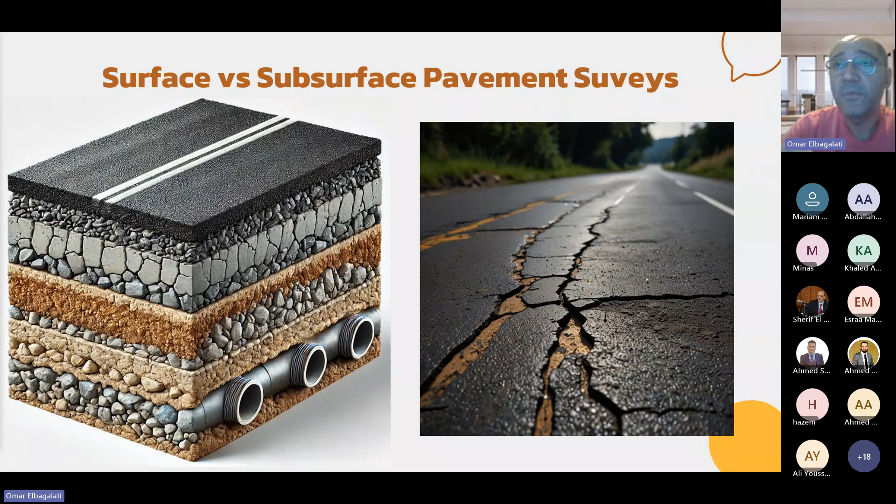Let's dive deeper and see some examples of what I can get from surface pavement surveys and what I can get from subsurface pavement surveys. So what is classified as a subsurface survey?

If you are interested in knowing your sublayer thickness, that's a subsurface pavement survey. Or maybe it's sublayer stiffness or subgrade capacity, like your CBR. Or maybe you are looking for moisture, trying to determine the moisture content of some of your layers, or even escaped moisture from a pipe leak. Voids, utilities, where are my electricity cables, where are my water and wastewater pipes, and so on. All of this is classified under subsurface pavement survey, and this is what we will focus on in this lecture.

On the right-hand side, this is where we have our surface. So what do I get from the surface survey? You get all the other good stuff that most of you should already be familiar with: PCI, the distresses like cracks, deformations, and potholes. Or maybe you are trying to determine the friction, surface texture, and of course roughness, the International Roughness Index, where you are trying to calculate IRI.

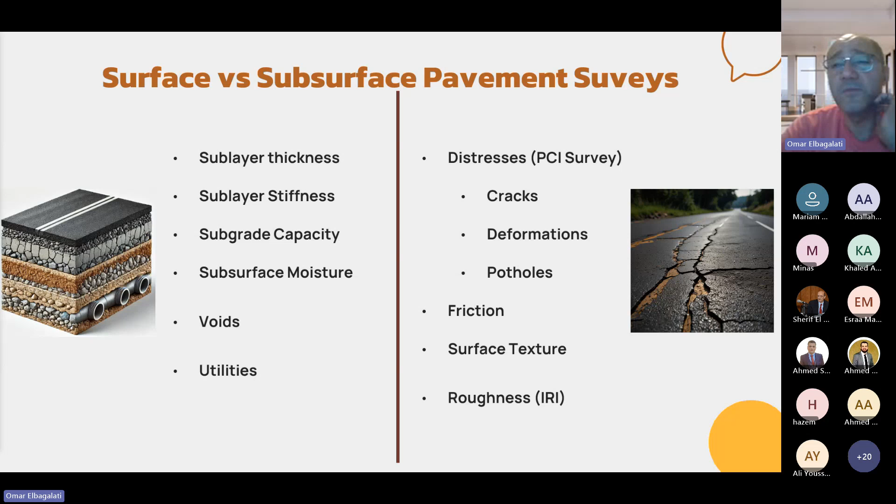If we want to classify subsurface pavement surveys deeper, I would say some of them are non-destructive and some are destructive, and today we will focus more on the non-destructive side. So what is destructive versus non-destructive? Basically, from what the name implies, if it is destructive, it means you are causing damage to your pavement section while doing the test. While if it is non-destructive, you are not causing any damage, the test itself is not harmful to the pavement.

Some examples of these are like the nuclear gauge that is used to determine the soil density or the sublayer density. GPR, which we will talk about in detail in this lecture. Falling weight deflectometers are also non-destructive testing used to determine the asphalt and sublayer moduli, if you will.

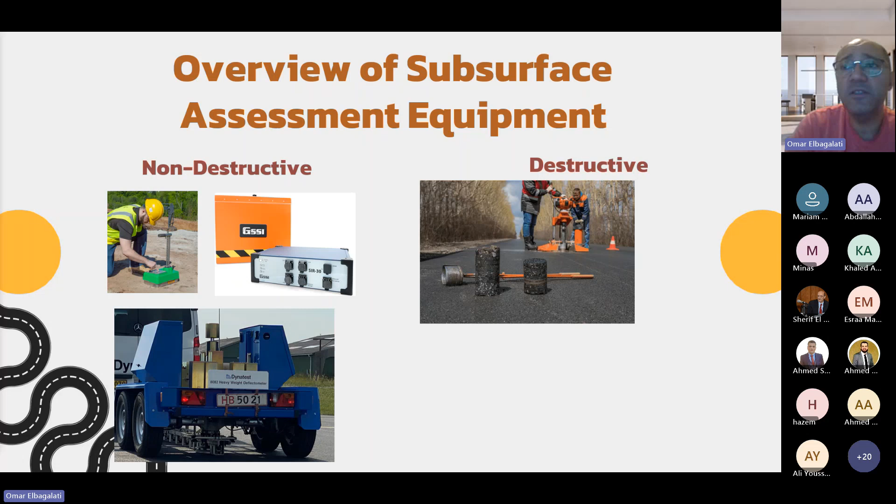On the other hand, you have destructive testing, and these are tests that cause damage to your pavement, like taking a core out from the pavement, or doing DCP testing to get your base layers and sub layers' CBR, or maybe you open a trench in the pavement and do your investigations from there. So what we will focus on today is subsurface, and not just subsurface, we will actually focus on non-destructive subsurface surveys.

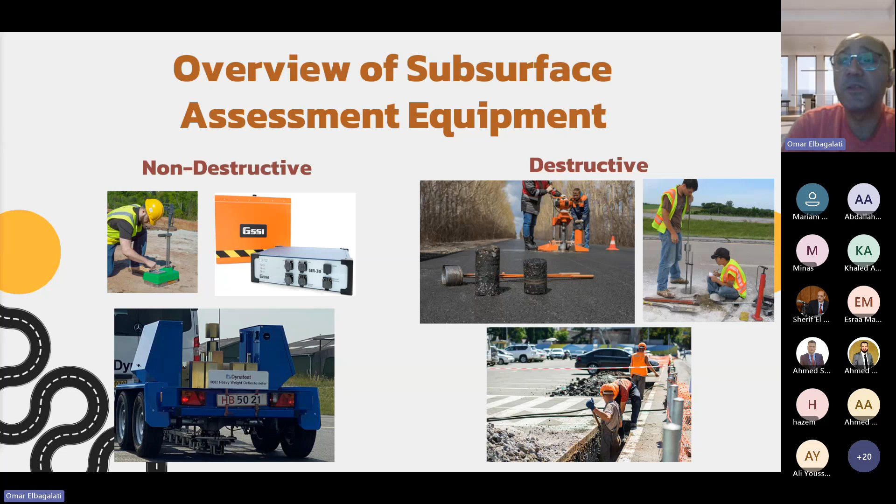So why do I do a subsurface survey? I'll explain this from two perspectives, one from the academic or scientific perspective, and the other from a logistic perspective. Let's look at the academic perspective one by one.

One piece of information you may get from doing a subsurface survey is your layer stiffness, the strength of your layers and sublayers. You can get this either non-destructively using the FWD, the falling weight deflectometer, or even destructively by doing the DCP or the CBR testing.

So why will I need something like this? If you want to do an overlay design, you first need to know the strength of your sublayers. If you are calculating a structural number, which you need if you are doing an overlay design using the 1993 AASHTO design method. If you are doing what we call PCR, ACR analysis on airports, which used to be called ACN, PCN - you may be more familiar with ACN, PCN, but recently the FAA has changed that system to call it ACR, PCR. And if you are trying to determine the remaining service life of your pavement - to do all of that, you will need to know the E-moduli of your layers and sub-layers of the pavement.

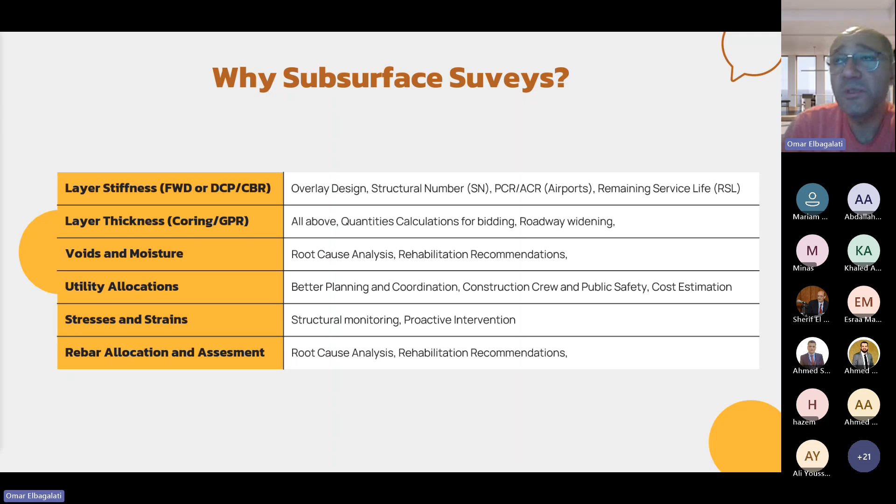So this is the why we do subsurface surveys in terms of the scientific side. But there is also a logistical side. Why do I even need to calculate thickness? Isn't the thickness something already in the design? Why don't I just open an as-built drawing or the design documents and figure out the thickness of my pavement?

There are three main reasons for this. Number one, I call it different entities. Within the same exact pavement segment, you will find so many players who have the authority to work on your pavement. Maybe the road was already designed and constructed, and the department that constructed this road is the roadway department. Then you have another department inside the city, or the county, and they have an in-house group, meaning they have the authority to go fix the road without contracting out someone. They already have the equipment and materials, and they go and do it.

Usually, these two entities, even in the US, don't communicate with each other. So they may go and add 1 or 2 inches of overlay, but they don't communicate. Now you have the as-built drawing, and you assume this is final, and you think you only have maybe 6 inches of asphalt, while in reality you have 8. But you don't know that because these two departments never talk to each other. Maybe a water pipe got broken, and the water department cut the road and fixed the pipe, putting in a completely different pavement section with different materials and thicknesses, and you never know about it.

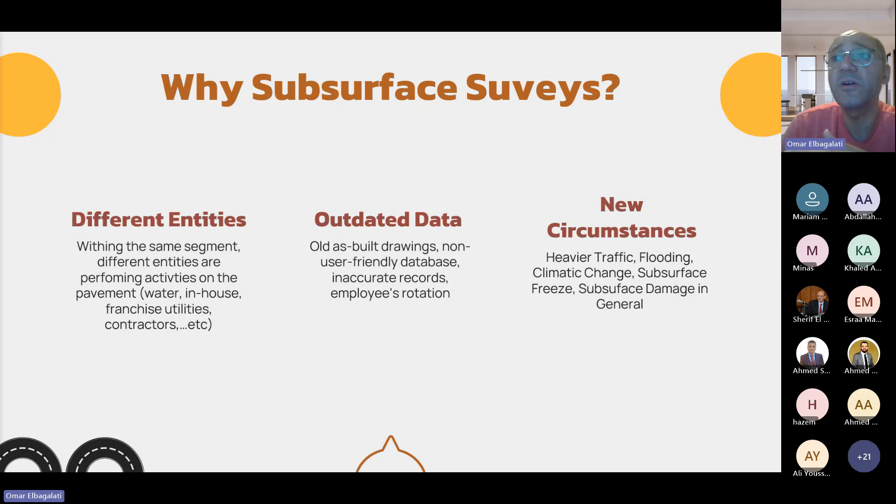So let's go and talk about our first example here for something advanced when it comes to surveying your pavement subsurface, or getting information about pavement subsurface. I trust most of you have experience or at least have heard of the term geotextile or geogrid.

So what is geogrid? Geogrids are basically this mesh, usually made of a poly material. You can imagine it as steel reinforcement for your soil and granular layers. It is not, of course, steel, but it performs the same function that steel reinforcement does in concrete, in soil, and in the base layer.

If we look at the section on the left bottom hand side of the screen, the very left is your pavement section if you are not using any geotextile. On the right hand side, if you use the geotextile or geogrids, because you are adding this extra reinforcement, you can actually end up with a less thick pavement section.

It has so many benefits. Basically, it's reducing the construction cost, reducing the construction time, even the environmental footprint, because if you are reducing the quantities, it means less water required, less fuel, less electricity, and everything, so less CO2 emissions and so on.

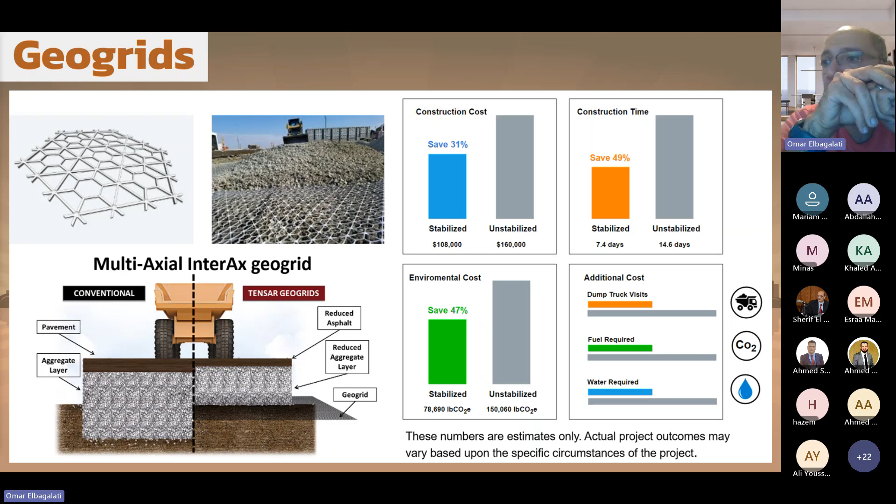But we are not here to talk about geogrids in their main function, which is making the road more stable or more strong. We are talking here about leveraging these geogrids by installing some strain sensors and temperature sensors on top of the geogrid itself.

You may have heard of a company called Tensar, which in the US is the biggest producer of geogrids. They came out with this idea, which is not commercialized yet. These geogrids come in rolls, and you spread these rolls over your subgrade layer, or between the base and the asphalt layer, during construction.

If I can have some sort of sensors on top of the geogrid and inside these rolls, when I stretch them over my pavement, I don't actually need any extra effort to add the sensors. They are already on the geogrid itself. So you are leveraging the time that you are already installing the geogrid in the pavement by adding these sensors in the factory from the beginning on the geogrid.

So the system that they have produced is basically simple. You have the strain sensor on the geogrid, it's on the pavement, everything is wireless, and it is being powered by, I would say, the motion or vibration coming from the vehicles moving above it.

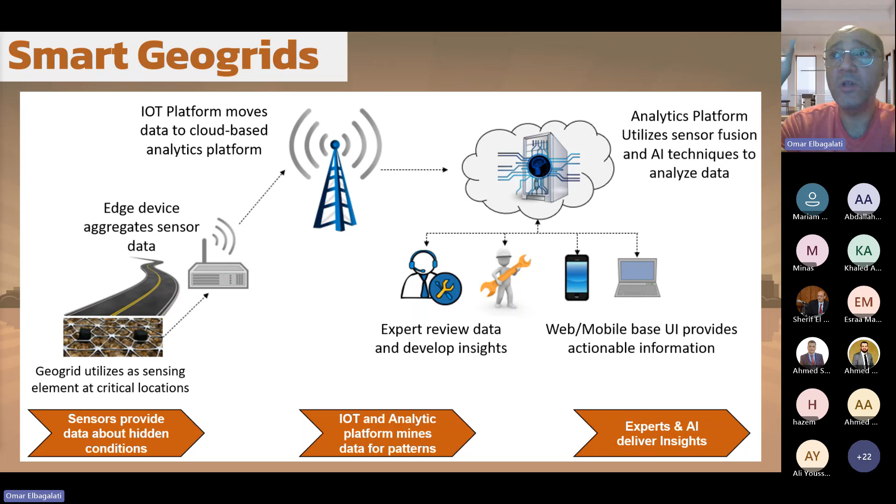powered by solar energy. So everything here is like you don't need any extra source of electricity. The edge device is powered by a solar system. The devices themselves, the strain gauges, are powered by the vibration coming from the vehicle.

I'm not an electrician, but I will try my best to explain how exactly these are powered by vibration. When a mechanical load passes over the sensor, it makes this piezoelectric transducer move, and when it moves and vibrates, it creates a current, and this current pushes the electrons to basically power your strain gauge, which will be enough power to transmit the data to the edge device.

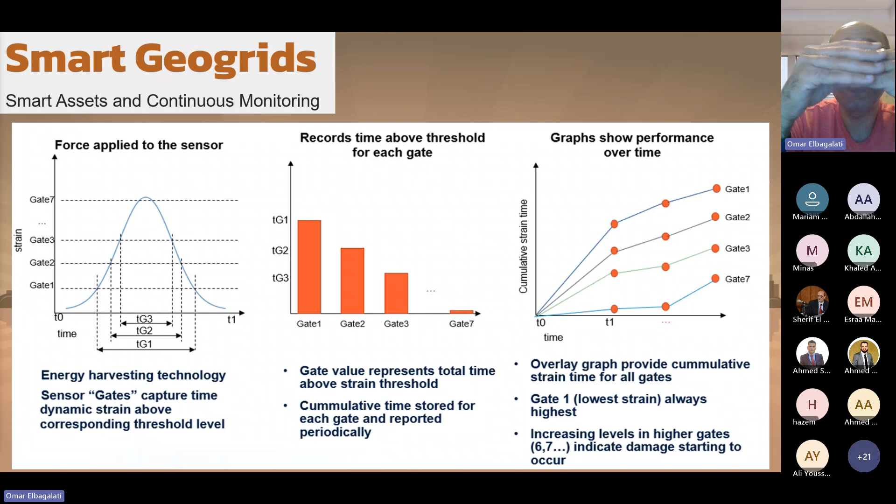If you see that gates number 6 and 7 are always being activated and you're collecting data, that means you have very high strains. This may be coming from the material getting weak, or because you have higher loads. But this is not what's important.

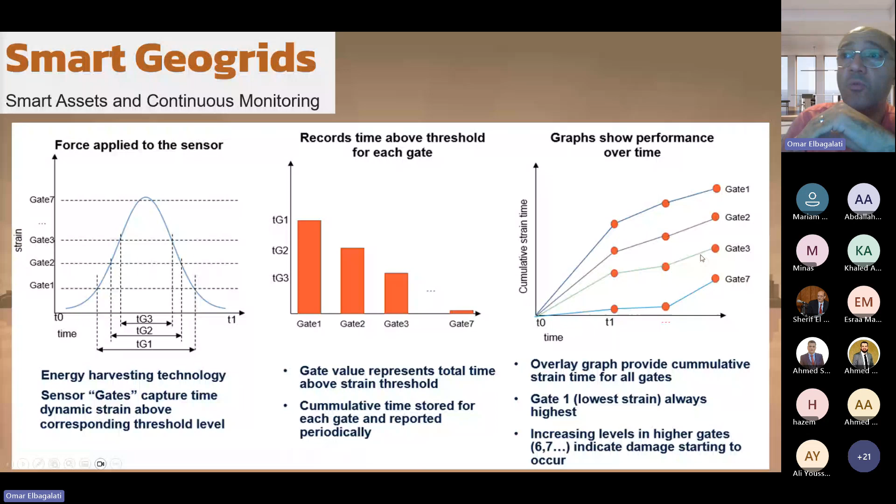What's important is what you see on the very right hand side, these slopes. Once you start seeing the slope, which is the accumulative strain with time, this will always go up. However, if it's going up with the same slope or a decreasing slope, it means your material is not getting weaker.

But look at gate number 7. If you see the last slope on gate number 7 starting to increase upward, that gives you an indication that your material at this exact point started to be damaged. So the pavement surface will still look very good. If you did a PCI survey, it will still be 100, but you know that things started to be bad down there from the tensile strain perspective.

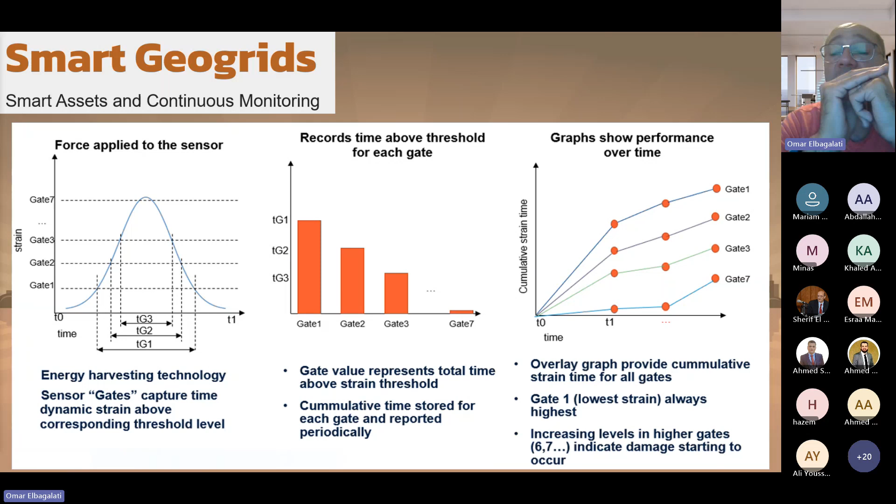So this is another way of looking at it. Imagine a car just passing by. You are measuring your response over time.

When the load passes, because it's at its highest, all the gates will be activated. Gate number 7 will measure the least amount of time, and gate number 1 will be the highest, and so on. Once you see D6 and D7 start being so high, it means your pavement started to get weaker.

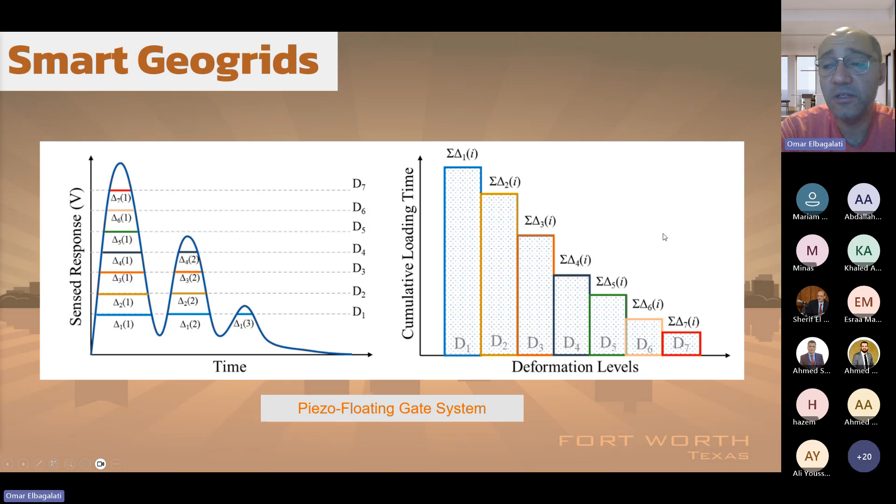So this system was actually tested in France. They have this testing facility, which I found to be fascinating. If you give it a look, they have these wheels rotating over the pavement.

It wasn't built just for testing sensors. Basically, let's say you came out with a new mix design or a new pavement material, and you want to figure out if it will last or have good performance. You go to their facility, pave a section, and they keep loading it.

This is what we call ALF, Accelerated Loading Facility. Basically, you are simulating maybe 20 years of traffic on a piece of pavement, but you can do this simulation in maybe 3 or 6 months.

There are many different shapes of this accelerated testing facility. In France, they are using this rotating one. Some others use a big truss with a wheel going back and forth, which they call HVS, Heavy Vehicle Simulator.

They've used this in France for the smart geogrids, and they started to test the damage, and did some FWD testing at the same time they were capturing data from the sensors. So the FWD testing, what we do is something called back calculation.

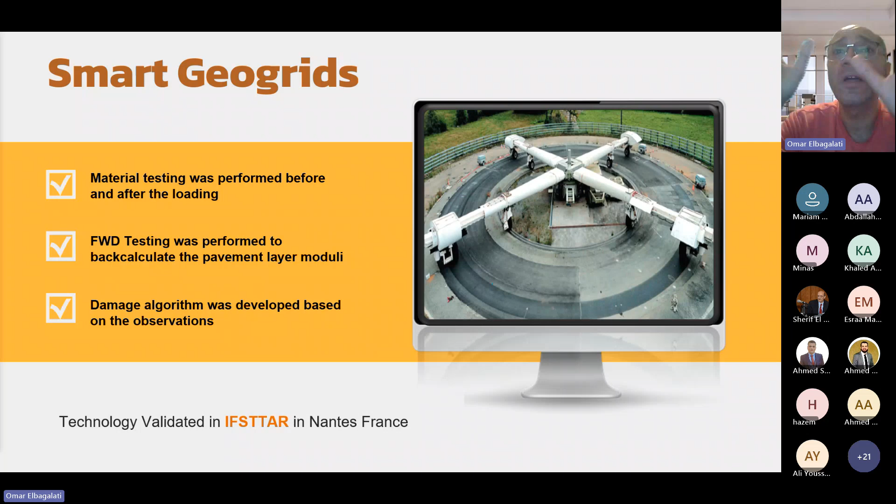So the system has been tested on real roads, tested in controlled environments in both airports and highway systems, and it was also tested in the lab. These are usually the steps you go through with a new product: you come up with an idea, prove the concept, test it in the lab, then in a controlled environment, and then completely outside on a real life road.

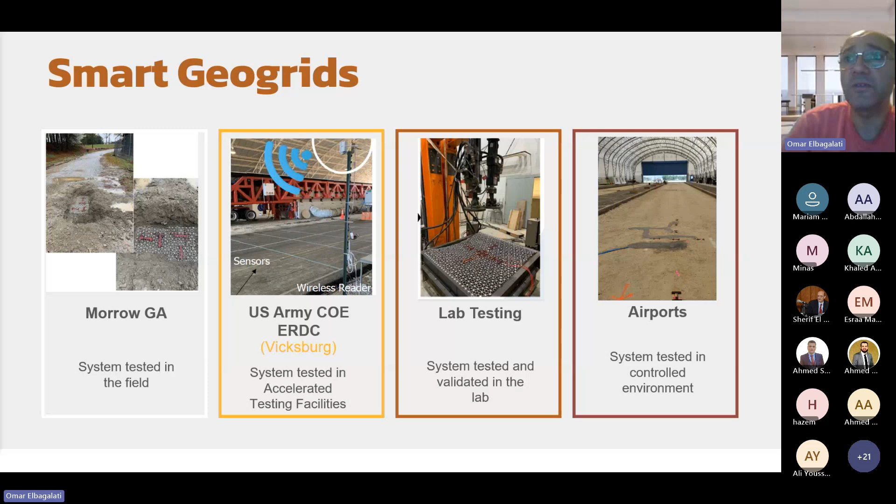So why are we actually doing that? What is the benefit of calculating the strain and figuring out what is happening before anything happens? If my road is in good condition and I can see it from the surface, why would I even care about monitoring it that early?

I would assume, let's say you started to feel some pain, and you are getting older, and you just wait and do nothing. You don't do your checkups, you don't go to your doctor. After a little while, you start getting really sick. Maybe you get a chronic headache, and you end up with a very expensive treatment or going through surgery.

This is a style of life. Some people decide that this is their style of life - they will not go to the doctor until they are really in pain, regardless of what happens. Others are different - every 6 months or every year, they go to the doctor, check their blood cholesterol, check their weight, and do the checkups.

Based on that, the doctor will start fine-tuning them: 'Hey, I see your blood sugar has started to increase, you need to change your diet. I see your cholesterol is going up, you may need to do more workouts,' and so on. These people will usually live longer and healthier.

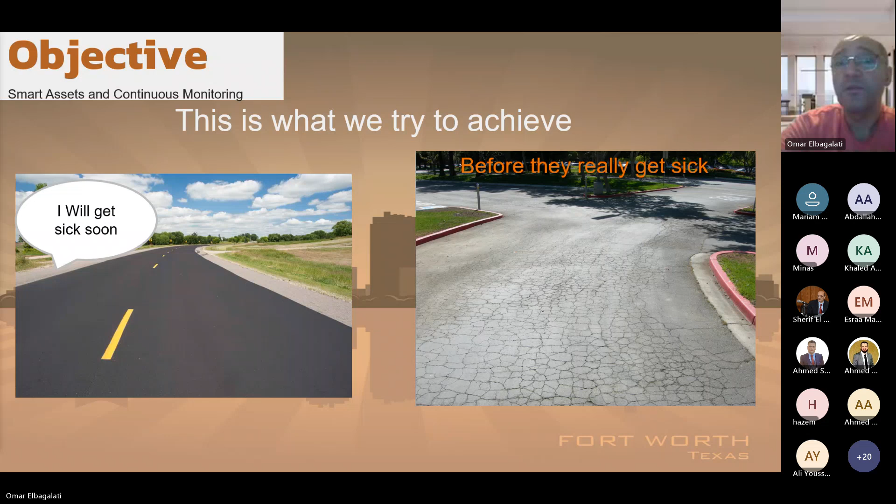As I mentioned, when you have a new product like that, you need to actually test it in the field. While I was working with the City of Fort Worth, we did this pilot project with Tensar. We had a concrete pavement project where we were replacing some slabs, and they came with the geogrids, and we started installing them with a sensor.

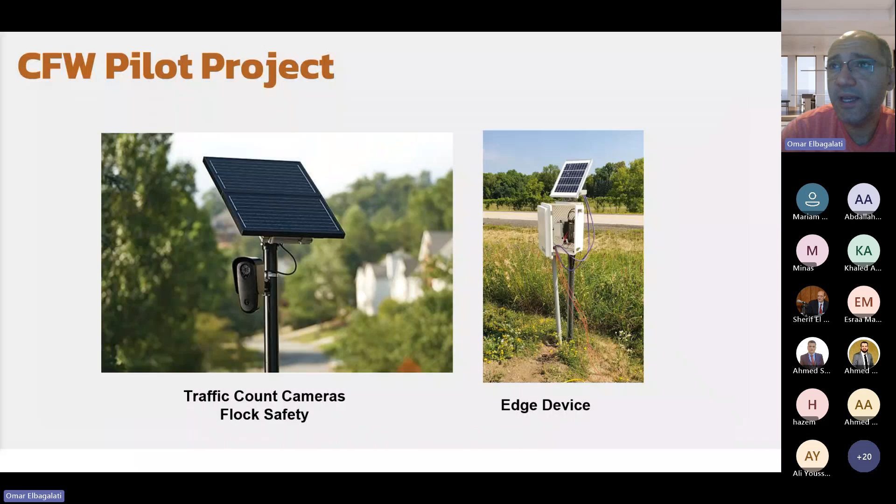I forgot to mention that these sensors are actually also measuring temperature. So if we look back, you will see some of them are gray and some are red. The gray ones were measuring temperature, and the red ones are the ones measuring the strains.

Why measuring temperature is important - again, if you recall in the very beginning, we said some extreme weather conditions can cause damage to your pavement. So you can figure out if it is freezing outside, it doesn't mandate that it is actually freezing inside the pavement. So you can know, is the subgrade being frozen or not? Or maybe you are in summer and temperature is very high, and then you figure out that one of the sensors is reporting lower temperature than usual compared to the other sensors. That can be a good indication that there is a water leak happening, and due to the water leak, temperature is reducing, and you can go and investigate further and figure out what is going on before it becomes an extreme damage.

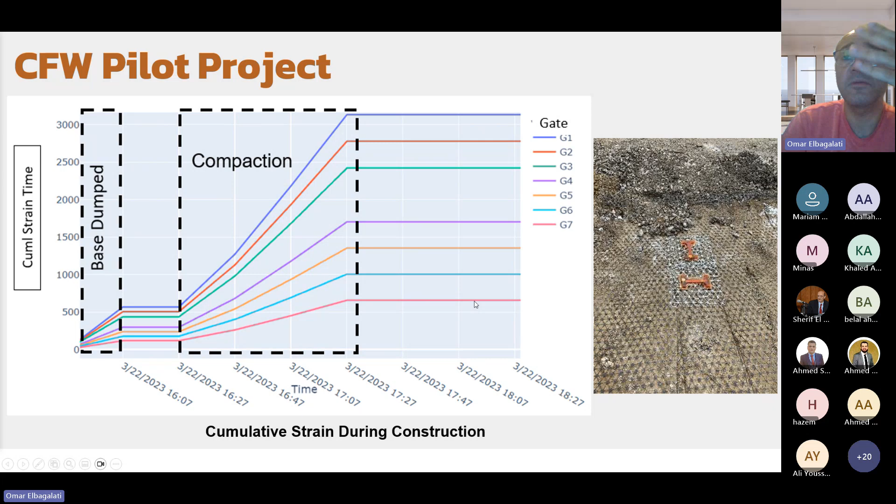So we installed the sensor in a street over there in Fort Worth called FA Boulevard. These were the different locations of sensors we installed over there, and we started capturing data. You can see here the data was making sense.

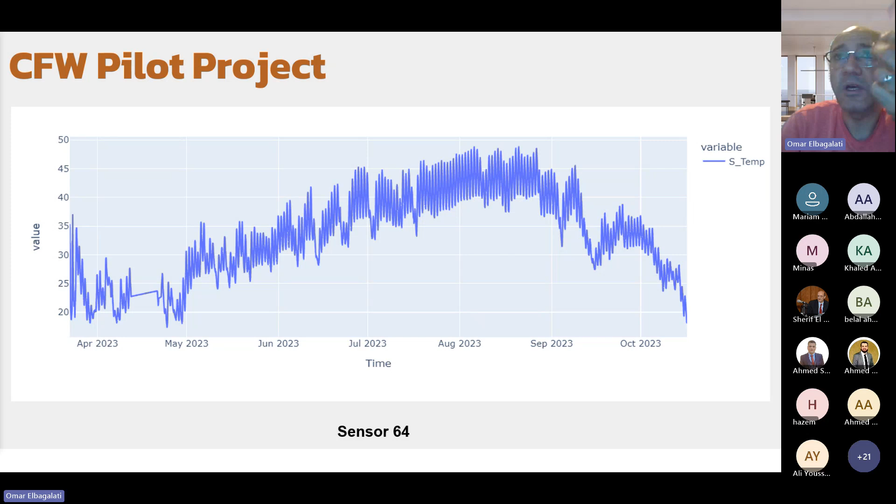So that was fortunate and unfortunate at the same time for us in the city. Am I getting damage that early in the life of my pavement? What's going on here? So we went to the field and we started to see these hairline cracks.

And this is the beauty of it: imagine when you build this road, the contractor will give you 2 years of warranty. If you have this hairline crack, you will never notice it. No citizen will ever complain about it because it is so small. So it will only start getting bigger after the street is out of warranty, and the city will need to pay from taxpayer money to fix it.

However, if you have a sensor like this and you see this signal, and you go out and see the hairline crack starting to initiate, you can go to your contractor and say, 'Mr. Contractor, we have only been 6 months or 1 year into the pavement life, and we started seeing cracks. The pavement is still in warranty. Please go ahead and replace this slab for me at your own cost.' So this is a typical real life example from the field of the usefulness of these sensors.

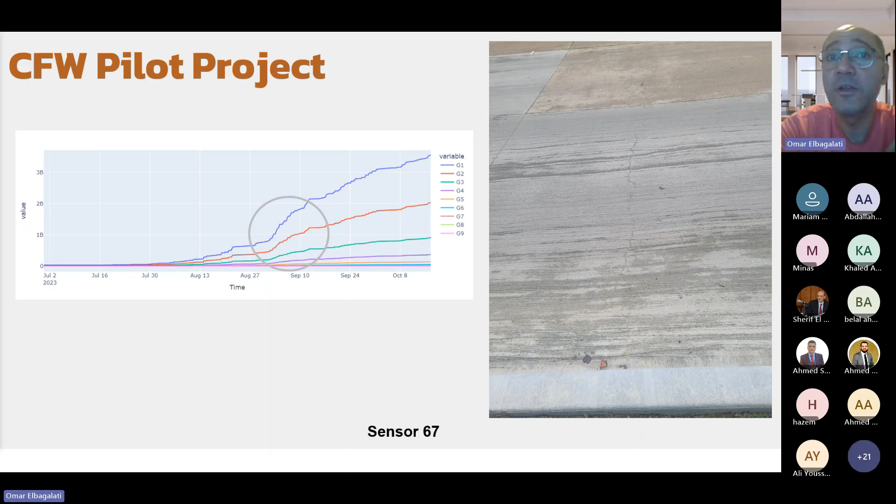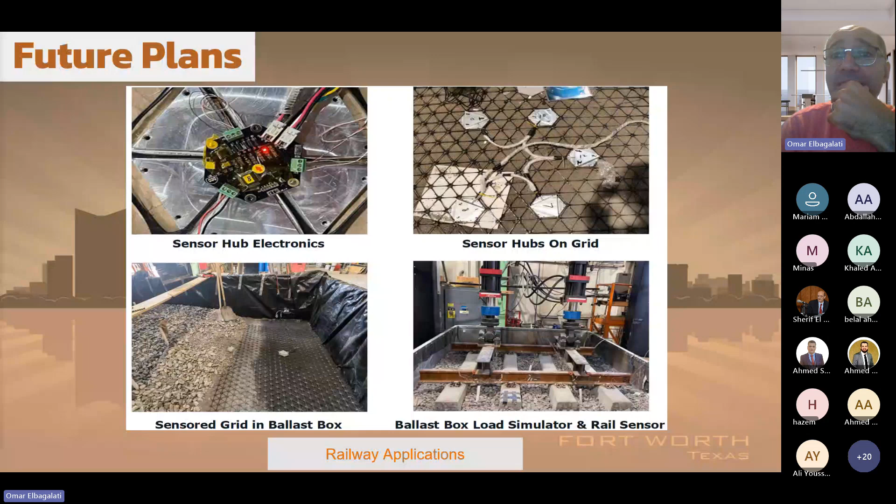Some future plans are also to use it in railway applications, and also to add some moisture sensitivity on top of them.

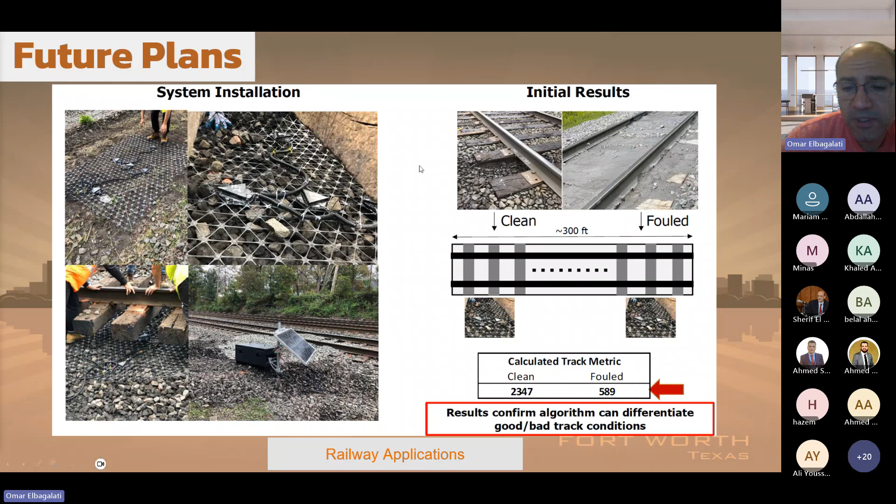I 100% agree with you, Dr. Sherif. If we go back, I actually took out some slides not just for the sake of the presentation. If you look here, I believe we had 15 sensors installed in this piece of pavement. I believe 2 of them have already failed by now, and the project was done in 2022. So yes, they are still very prone to failure even right after construction. But if you have 15 and you still have 13 of them running, it's good. They are very easy to break though.

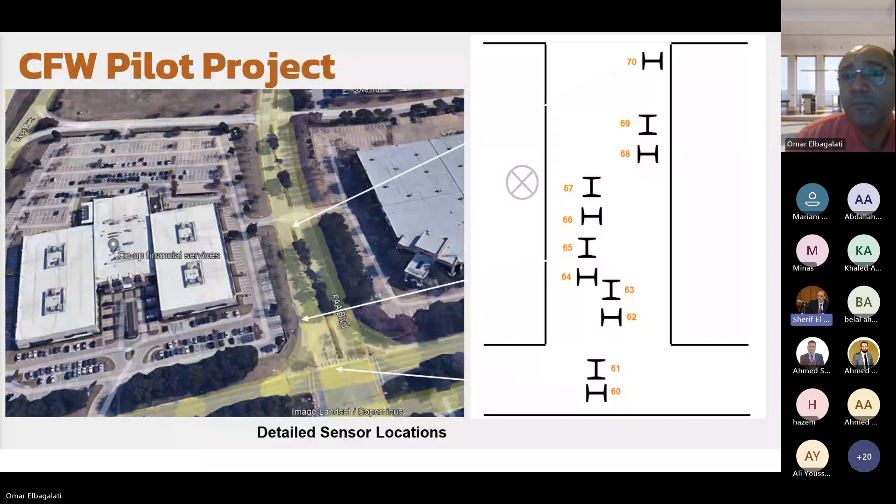But the idea is actually very nice, as you integrate a lot of work that's been done about energy harvesting from pavement, in addition to installing sensors, integrating all these systems together, collecting the data wirelessly, using the energy generated from the movement of vehicles to collect the data. I guess all this is really very nice, and the future applications are tremendous.

Thank you, doctor. So the other one is a little bit less sophisticated, I would say, and it will go way faster than the smart geogrid. It's called smart tagging, and it's by a startup company called Infratico in Michigan.

Basically what they are doing is they created some devices, a little bigger than a coin size, that can store data on top of them, and you can read this data back using RFID, as we will see in the next slides. What is unique about these small devices is that they are very strong, able to handle the heat of the asphalt mix and the weight of the construction equipment.

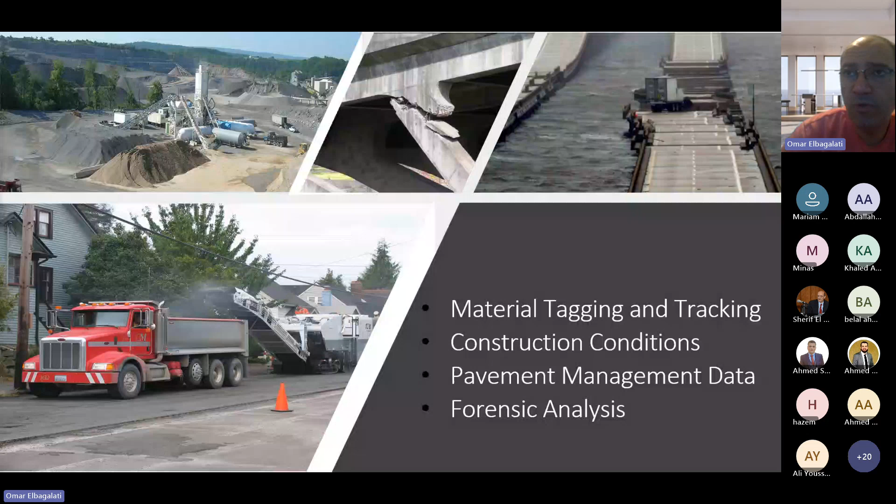What does that mean? Imagine now I can add some data on this coin and say, okay, I'm paving a road in Mansoura City, Galaa Street, and today is October 26, and the temperature is this and that. The pavement design section is this and that, my mix design for the pavement, this is the type of bitumen I'm using, any data, what is the name of the contractor, the name of the engineer, whatever. And you literally put this coin inside while mixing the asphalt mixer.

So when you pave the road, you can go back 20 years after and read this data back. So you are using your road, your pavement itself, as your database. Instead of the data being saved in the cloud or in papers or in hard drives, you are using your pavement as your hard drive. You are saving the pavement data on the pavement itself.

So there are two ways to read this data back. If you recall when you go to the supermarket and they scan devices that scan the barcode, you can have a similar device and walk with it to harvest the data. Of course, you will need to be maybe 6 to 7 feet close to where the device location is. Some more advanced options come with it too, like an accessory where you have a bigger device that you just put inside a vehicle, and as you drive the vehicle over the road, it will start harvesting back the data from all the devices installed out there.

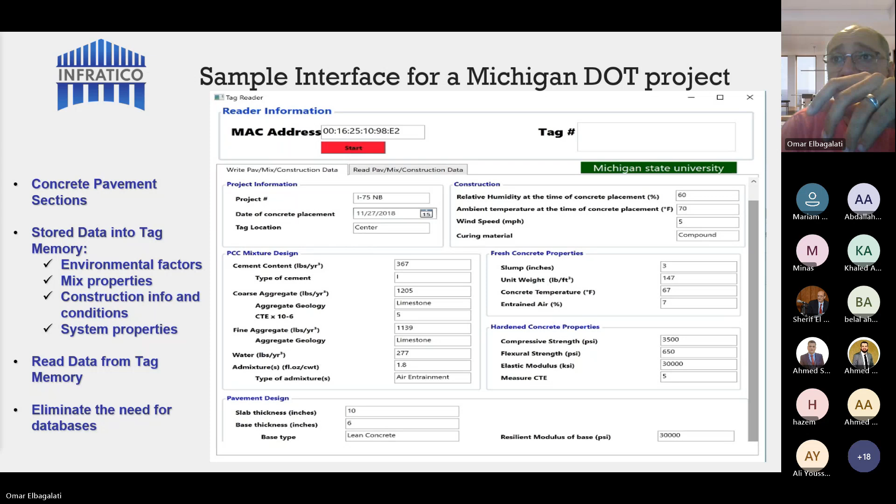I don't know how they could come up with it. Well, I think this is why it is very innovative - you have something that's strong and that cheap, basically.

So you pave your road. You can even do some marks to remember where your sensors are that you've installed in the past.

And you can even, let's say you have some changes, maybe you add 1 inch of overlay 1 year later - you can come back, get the device close enough to the sensors, and override the old information that was there.

So it is not just once and for all. You add the data during construction, and then after construction, if something changed, you can go with the same device that you read with - you can even write and overwrite on these sensors.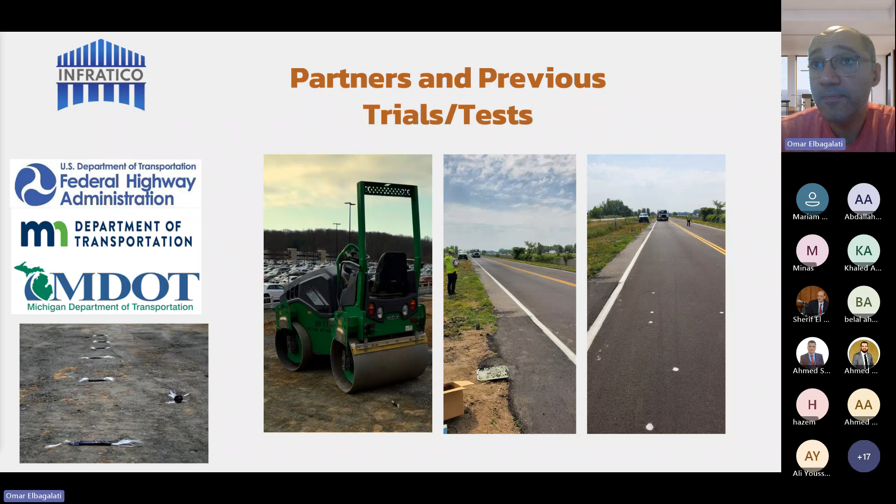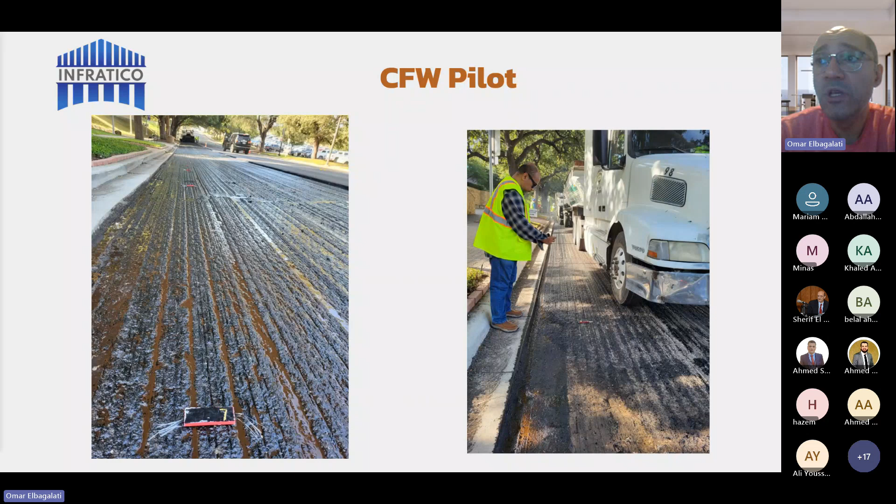So again, when I was in Fort Worth, we did an actual project when we were paving, and we used these sensors and saved the data on them. You can see here the technician is basically inputting the data, like the pavement temperature and so on, onto the sensor before construction starts.

So this gets us to, okay, why are we doing this? First of all, as I said, because different entities are working on the road and so on - this is the stories I told in the beginning - it is hard to track some critical information and to trace the material properties and so on.

Also for construction quality - you assume something in the design, and then when you start construction, you may not get the actual product, maybe not the actual mix, or it's not paved at the actual temperature or compaction and so on. So you have the ability to write what really happened on these sensors instead of what was supposed to be happening.

Now also you should have heard about cloud cost and data storage cost and so on. In this case, you don't even have to have your data on the cloud and pay cost to save them, or even be prone to hacking. So basically no one can hack these devices because they are not accessible through the internet or anything.

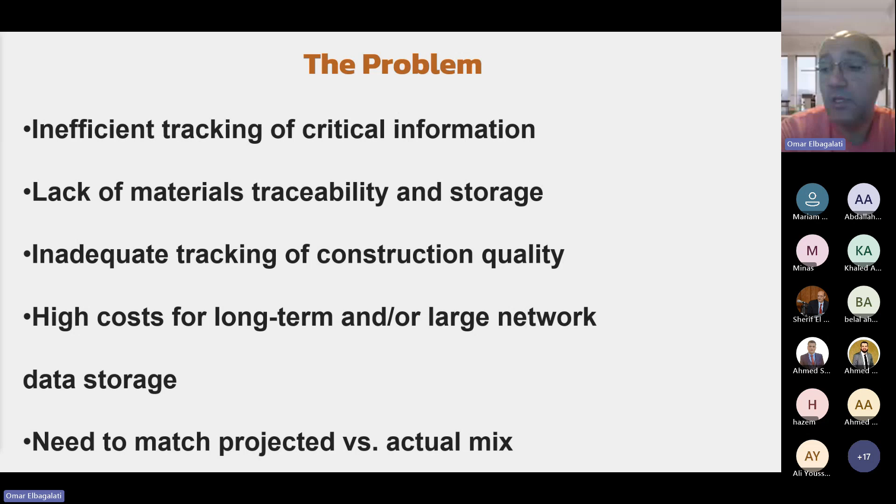You have to have the RF device - this is the only way that you can mess with the data. And you can now match what the material properties that you want it to be versus what is actually down there. So they are low cost.

As I said, it's like $1 per device. Maybe for your first project, you will pay a little bit for the RF reader, especially the one on the car, and maybe the license for the software. But then every time after that you want to use these sensors, you are just paying for the cost of the sensor itself, which is basically very cheap.

The reader is fully integrated with the tags. We call it smart tags, and they can read and write on top of them. The software is 100% customizable; you can add whatever types of data you are interested in.

There are no batteries. Again, it is actually powered by the device. So if there is no RF device next to it trying to read or write on it, they are never used, so the battery will last forever. If you are reading from it, the device is charging it while reading or writing, so it will basically last forever. This is what the manufacturer is claiming.

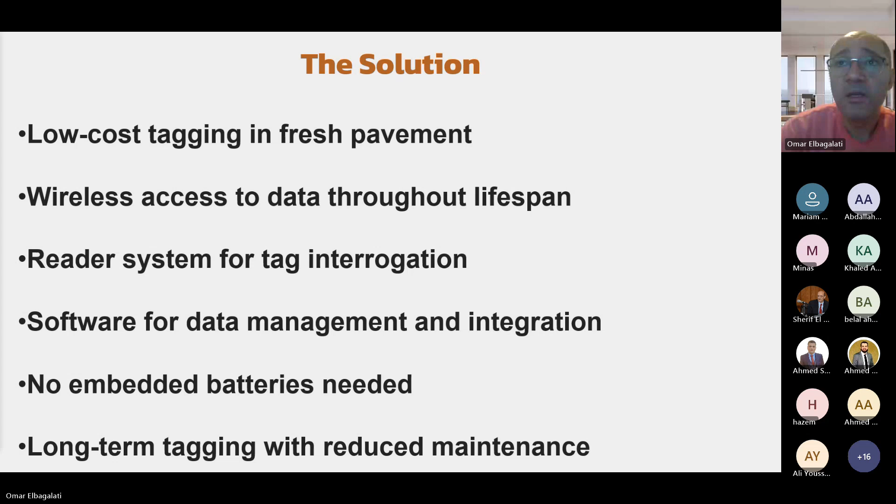Now we'll come to ground penetrating radar, which I would say is an advanced technique, but not a new one. It has been out there for the last 15 to 20 years. However, in the last maybe 5 years it has gotten more trendy. In the US, if you have 50 DOTs, maybe 5 of them were doing regular GPR surveys, another 5 or 10 were doing it only on a few projects, and the rest weren't using it at all. Today the utilization rate has increased a lot, and everyone in the US is using GPR surveys, and the market is booming for GPR.

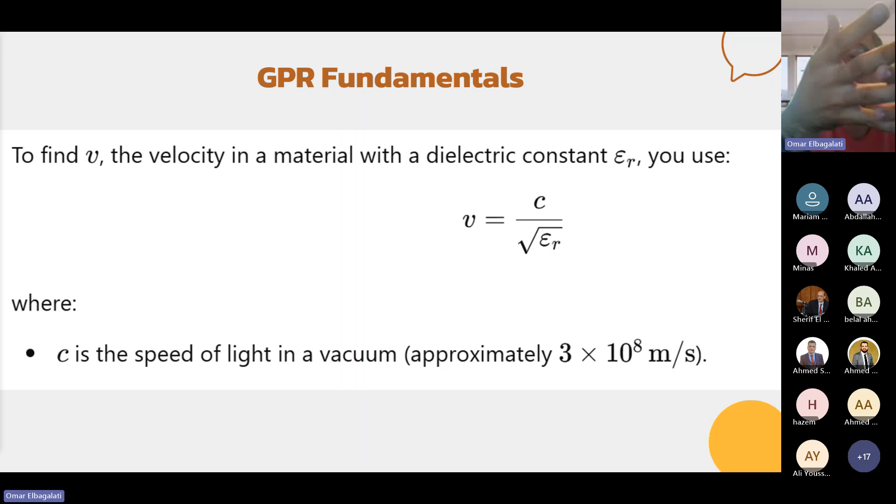However, there is another equation that tells you the velocity of a wave going through any material is equal to the speed of light over the square root of the dielectric constant. If we know that the dielectric constant is actually a material property we can calculate, then you can calculate V. And if you can calculate V, you can then calculate the depth.

So your final equation will basically be: D equals 3 multiplied by 10 to the power of 8, multiplied by time, which you get from your GPR, over 2 times the square root of the dielectric constant, which is a material property that you can even assume, or have one core taken from the pavement to determine the dielectric constant.

So sorry, I didn't mean for this lecture to go this deep, but I think this equation is simple enough: you measure time, you know the dielectric constant, and with these both you can calculate the pavement depth.

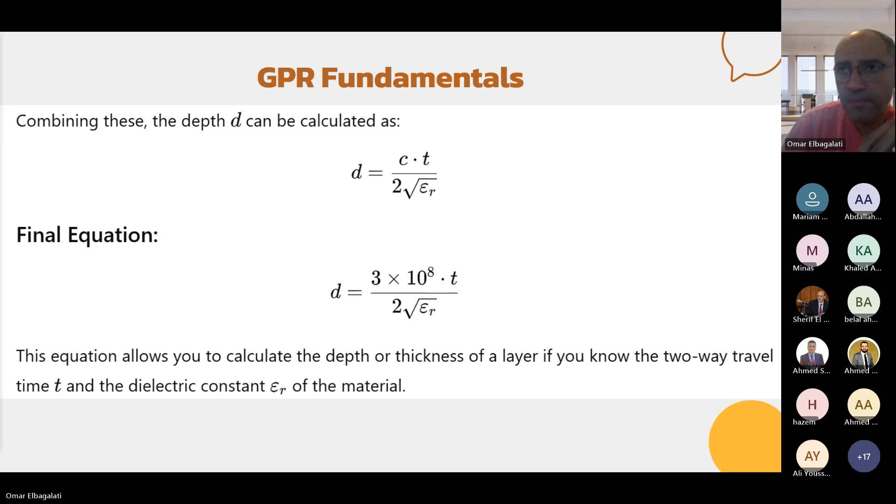This is very important: if you have an antenna with high frequency, it can tell you the pavement thickness is 2.4 inches very accurately. But if your layer is very deep, maybe 2 feet or more, the signal will die before even reaching that depth. So it will be very good at giving you a precise estimate of your asphalt thickness and base layer thickness, because it has high frequency.

Sometimes you are interested in having two wheel paths, so instead of having just one 2 gigahertz antenna, you have two 2 gigahertz antennas. Maybe you do this even if the lane itself has no big variation in thickness, which sometimes happens. Let's say you want to measure the thickness of the shoulder and the thickness of the lane in the same survey. You have a big project, maybe 100 miles, and you don't want to drive twice. So you can drive with the line between the shoulder and the lane between the car wheels, and you get data from the left-hand side from the shoulder, and from the right-hand side you get data from the lane, and you do the job in just one pass.

Give me 1 second, I just need to add my charger. Sure.

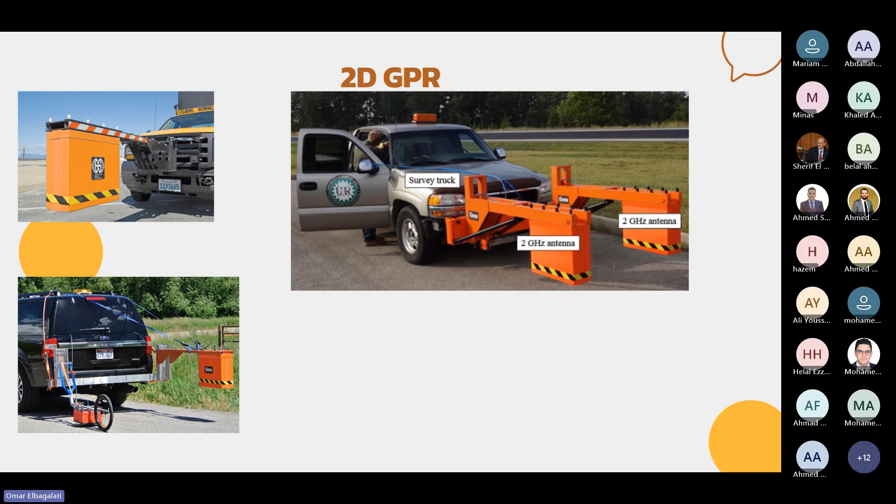Sorry about that. So you can have two antennas at two different frequencies for an obvious reason, or you may have two antennas at the same frequency but at two different wheel paths for a different reason.

So what you will get from the 2D GPR is a 2D screen like the one that we are looking at right now. I will explain further how to interpret data from this image.

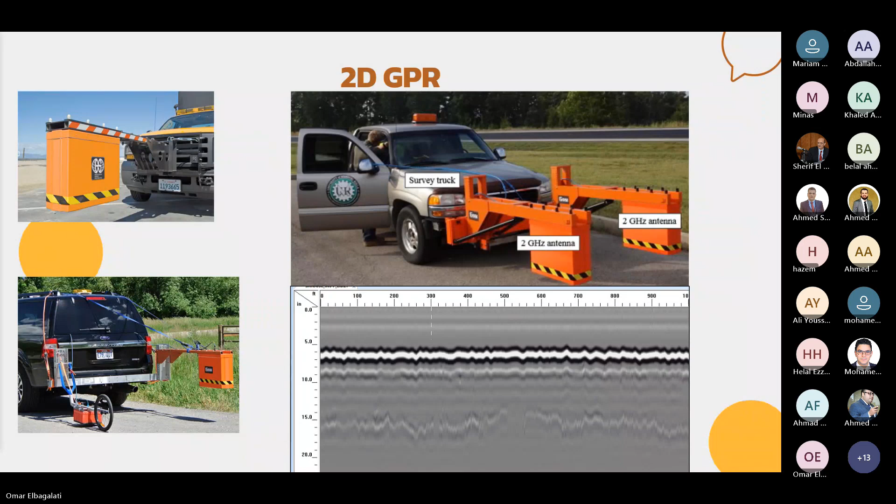The other thing is the 3D GPR. Give me one.

Sorry, I had some noise coming here. So if you look at the 3D GPR, it's 3D in terms of two things. In terms of space, you can see the antenna is occupying the whole lane, so instead of getting data only on one wheel path, you are getting data from the whole lane width.

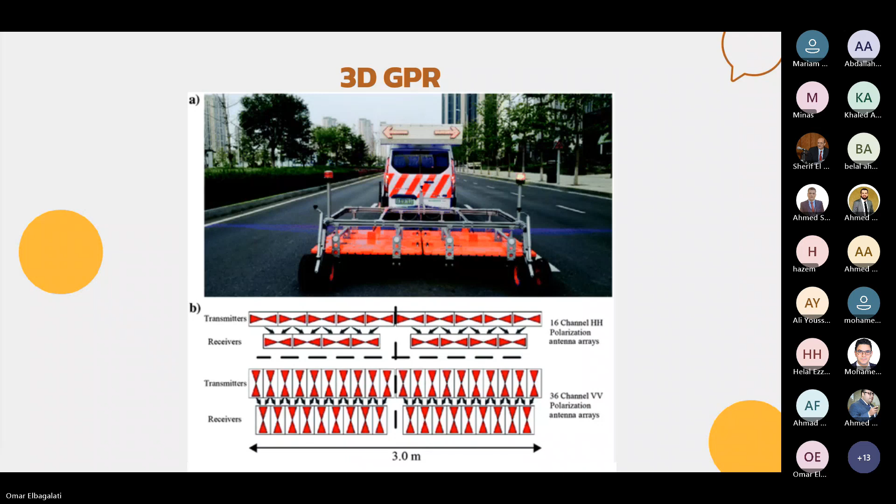And if you look further, the frequency itself is fluctuating. So the same antenna, instead of being at 2 gigahertz or 500 megahertz, keeps changing frequency. So it gives you both precision and also depth. And of course, it's way more expensive equipment.

So what you get here is a 3D shape. You get the same image you get from the 2D GPR by looking on the side of the pavement. So if you have depth on one axis and distance on the other axis, you can see the pavement profile, which we will go through in a little bit.

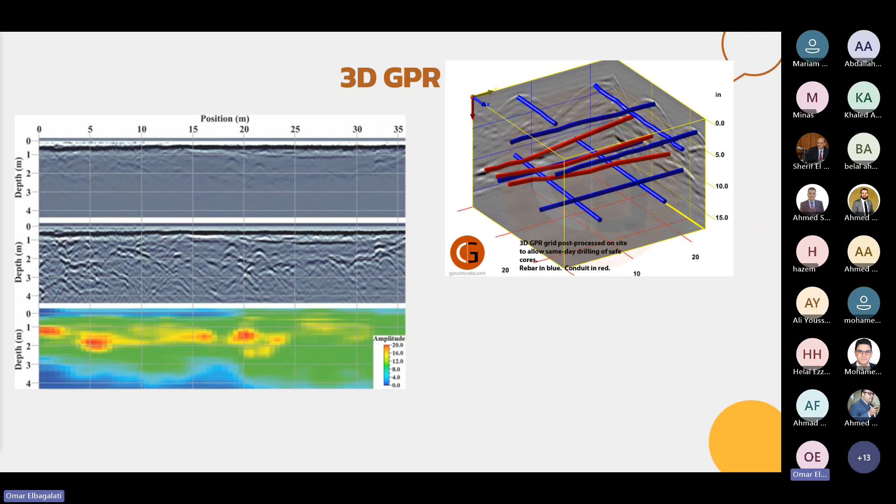But you can also imagine that now you can walk into layers, not just one image like these two. There are multiple, like you are moving laterally inside the pavement. Another way to look at it: if you're viewing from a bird's eye view, you get a GPR image for everything. To imagine it even more, if you have pipes inside the pavement, you can actually see them. You cannot get this image with the blue and red pipes from a 2D GPR. You have to use a 3D GPR to get an image like that.

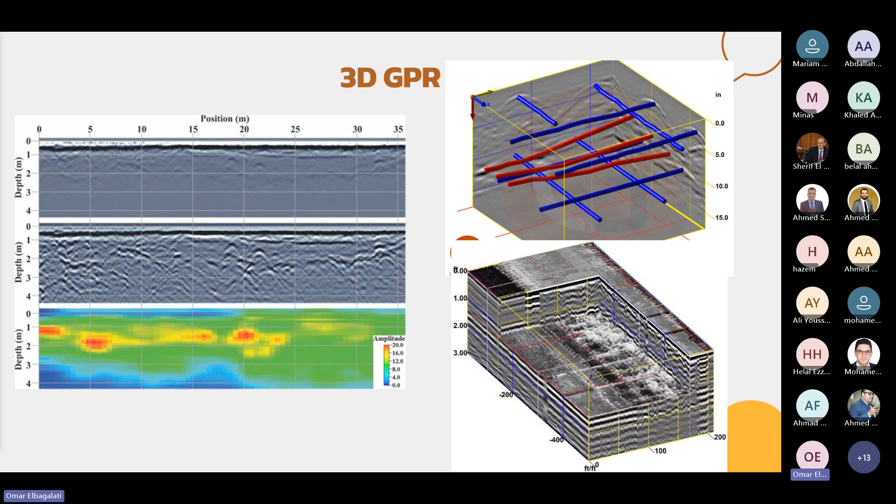So what I'll be focusing on for the rest of the lecture is how to read and analyze data coming from a 2D GPR. What you're looking at here is a typical pavement section from a 2D GPR. On the x-axis, you have your distance, basically the travel distance. And on the y-axis, you have the depth, which isn't actually depth, it's time, but we'll call it depth for now.

From the surface to the first wave that you're looking at, this is your first interface. So the first black wave that you're looking at is the interface between the first layer and second layer. The first layer's thickness will be all the way from depth 0 up to this layer. Then the second wave will basically be your second interface, the interface between layer 2 and 3. From the first interface to the second interface is the thickness of layer 2, obviously.

If you are using a 2D GPR, the most famous software to analyze the data is called Radan 7, from a company called GSSI, which is basically the biggest producer of 2D GPRs in the US. When you collect the data, it will come out something similar to what you see on the very left-hand side, a little bit vague and not clear yet.

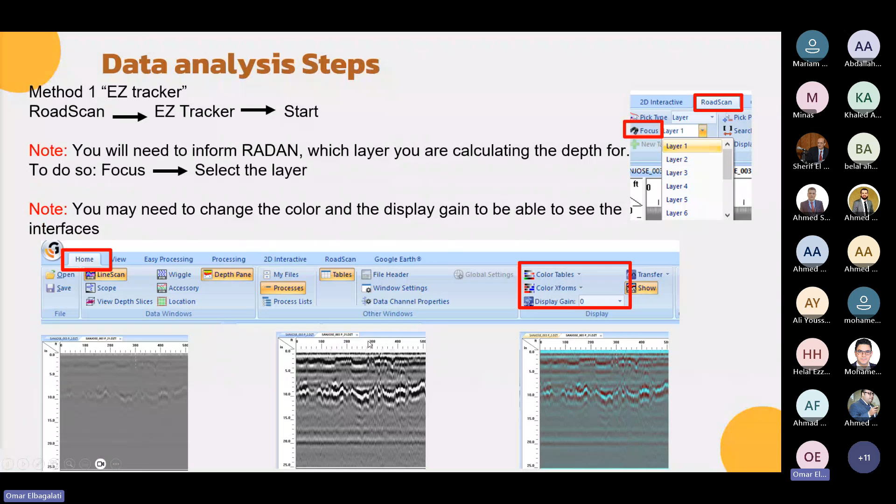Something interesting to look at is the wave itself. Let's say in the middle, it is black, white, black, so the part in the middle is white. This is what we call a positive wave. A positive wave means, if we go back to the amplitudes at the very beginning, if they are on the right, the wave will always be black, white, black, with the white in the middle. And if it's vice versa, on the left-hand side, it will be white, black, white, with the black in the middle.

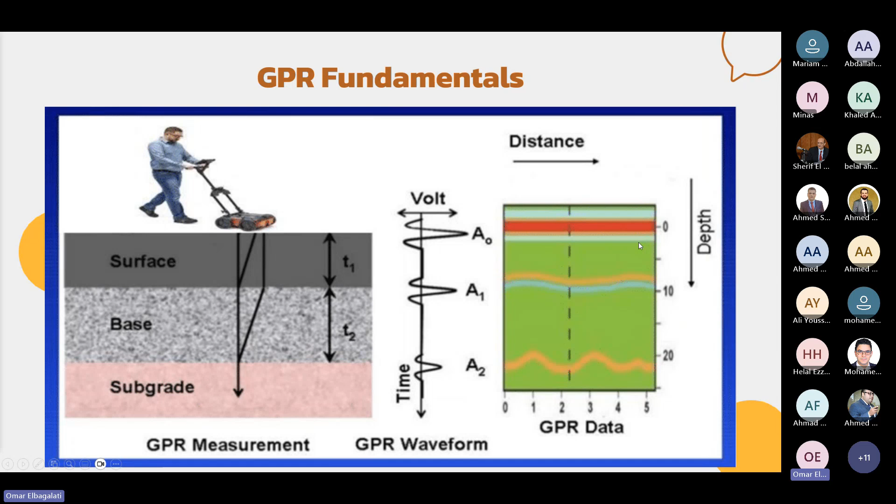So what does it mean to have a positive wave versus a negative wave? If you are going from a stronger material to a weaker material, you should see a white wave. So if you are going between the asphalt and the base layer, you should see a white wave. But if you are going from a weaker material to a stronger material, this is a negative wave, usually shown as black. You may ask, why in flexible or even rigid pavement is the stronger material always on top and the weaker on the bottom, so shouldn't we always only see white waves?

Actually, this is true only 90% of the time, because you've of course heard of a composite pavement. If you are doing a composite pavement, you have asphalt on top of concrete. In this case, the interface between the asphalt and concrete will be negative, and your wave will be black, because concrete is stronger than asphalt.

The other way of interpreting the data is to highlight a block where you feel confident that this is the interface, and you ask the software to add points and fill it in. Once this is filled in the software and you've already highlighted all the interfaces...

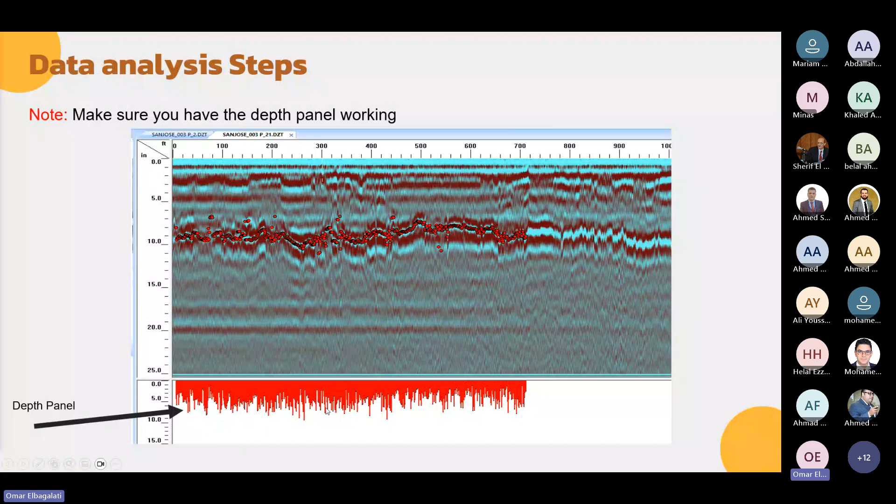Remember, this depth you are looking at, say these red dots are around 10 inches, this is not accurate yet, because it assumed a dielectric constant that's the default in the software to calculate the thickness. That's why you see the layer here is very noisy, fluctuating a lot.

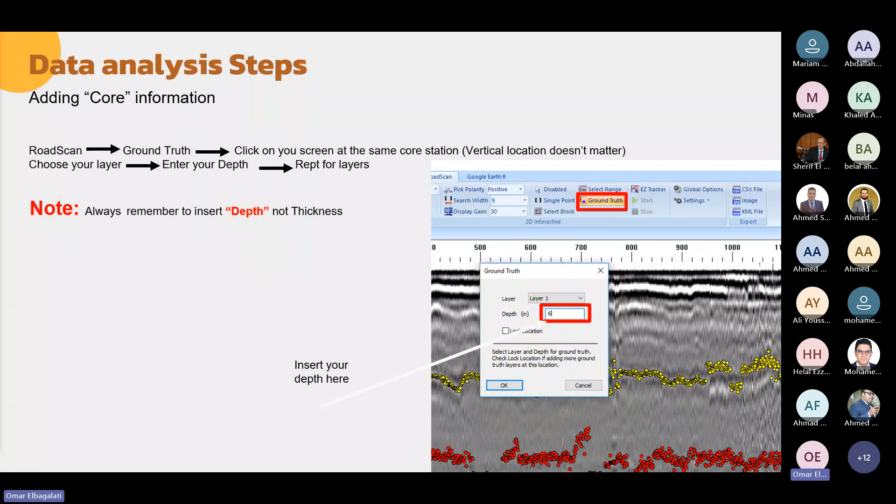So by having one core, you add the ground truth. You tell the software that at this specific location, the thickness of this layer was 6 inches. Once this is done, the software will calculate the dielectric constant and start calibrating it, and now you will see how this fluctuation in the layer thickness is gone.

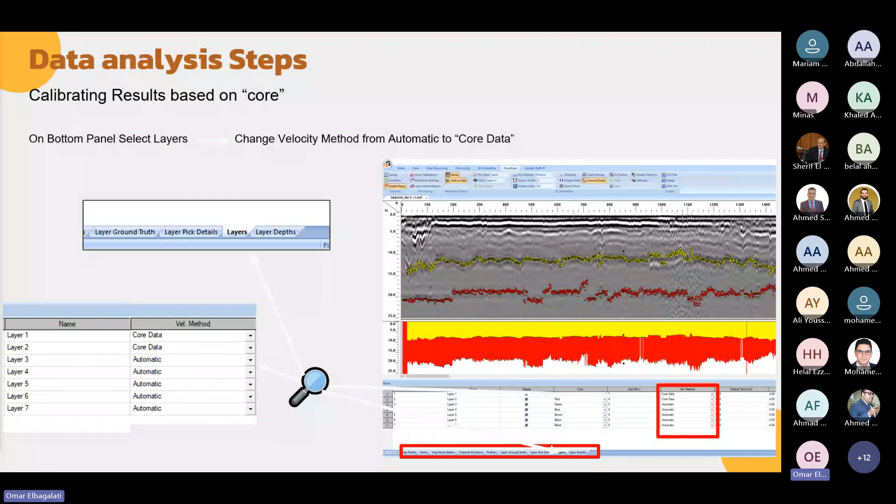So the first step, we'll go through the steps again one by one, I'll summarize them. Once you have the core, we call it a ground truth, and you insert what the core thickness is, this is what we call GPR calibration. If you imagine before GPR, for 1 mile, people used to take a core every tenth of a mile, so 10 cores, which are very expensive. Now with GPR, it's recommended you take 1 core per mile, so the cost has been reduced by 90%, basically.

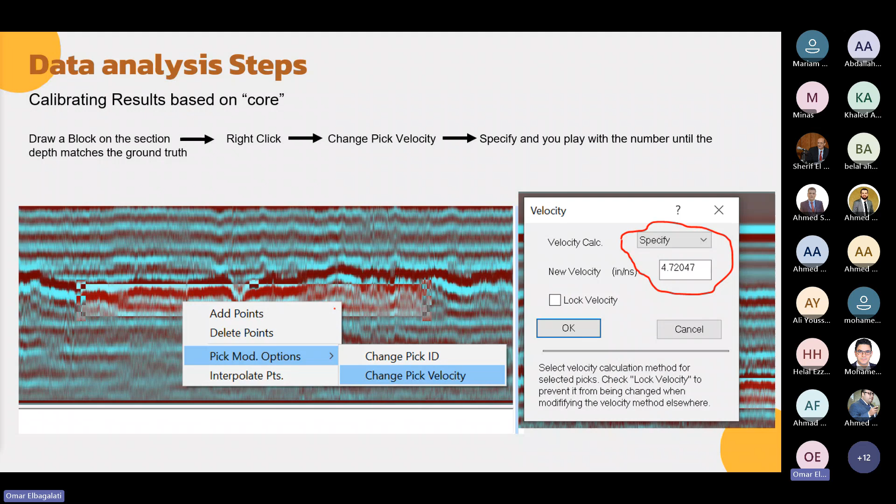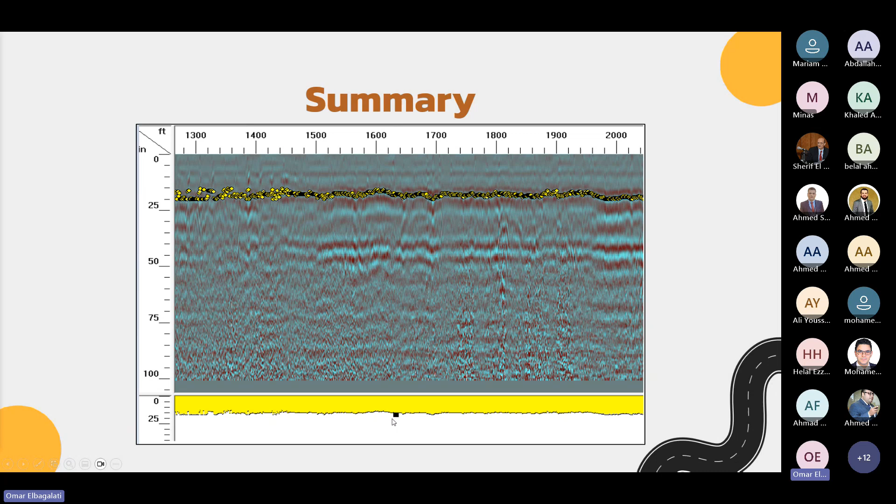To summarize: number one, you remove the noise; you select the color you like; you add the dots, which are the interface between two different layers; you add a core, which is the black dots you're looking at here, to do your layer calibration. Then you are done, and you can transfer it to the client if you are doing a consulting business, or even if you're doing it in-house. Something like that will be the final product.

Usually every 1 foot, which is about 30 centimeters, right? And then we summarize it and take what we call a moving average every 100 feet.

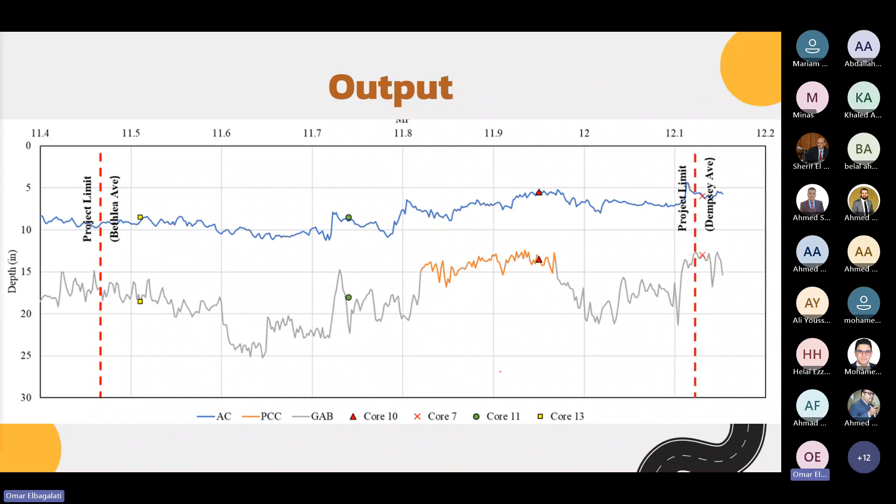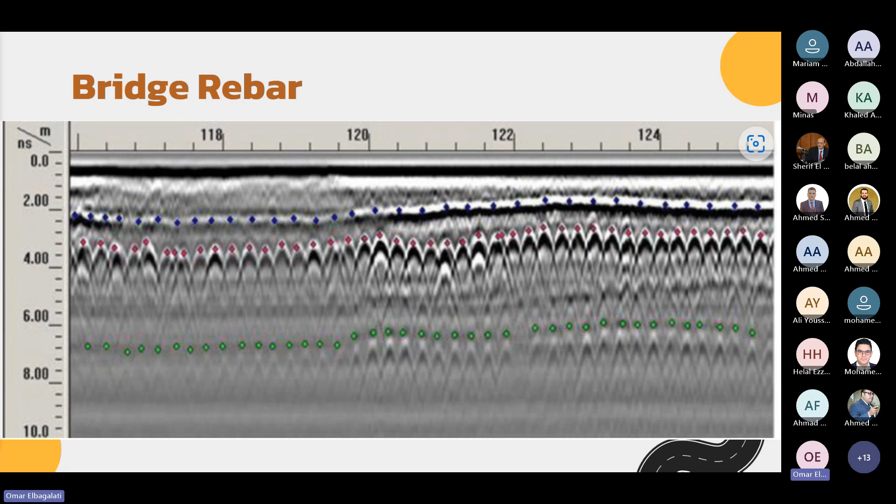Another application of 2D GPR is not just pavement layer thickness. If you look at these hyperbolas, the shiny ones in the middle with the magenta dots, these are basically your rebars. So you can actually use GPR to determine the thickness or the depth, if you are testing reinforced concrete pavement, or if you are testing on a bridge.

So I'm ready for the questions, and I hope we learned something.

Excellent presentation, Dr. Omar, and I really enjoyed it. Very interesting information, a lot of new knowledge, at least for myself. Excellent points for young researchers to work on, or if somebody wants to start, as you mentioned, some new ideas to maybe start up a business. There is plenty of knowledge here in what you have presented. Thank you very much. Thank you. Well, thank you, Doctor. Thank you.